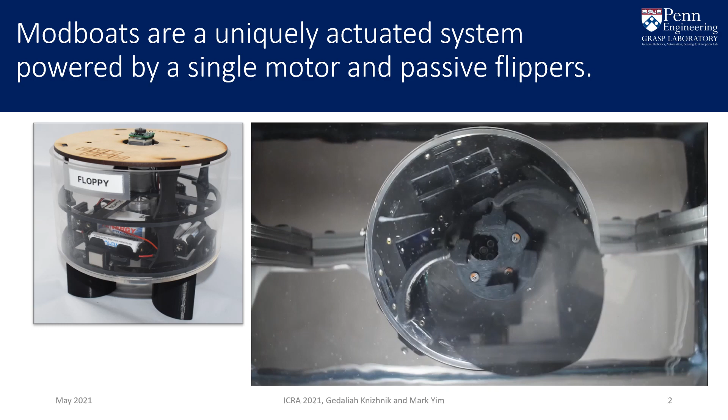The motor spins the bottom body relative to the more massive top body, and the oscillation causes the two flippers to open in a paddling sequence. This can be leveraged for both thrust and steering. By modulating various features of the oscillation, we can create effective steering control for this unique robot.

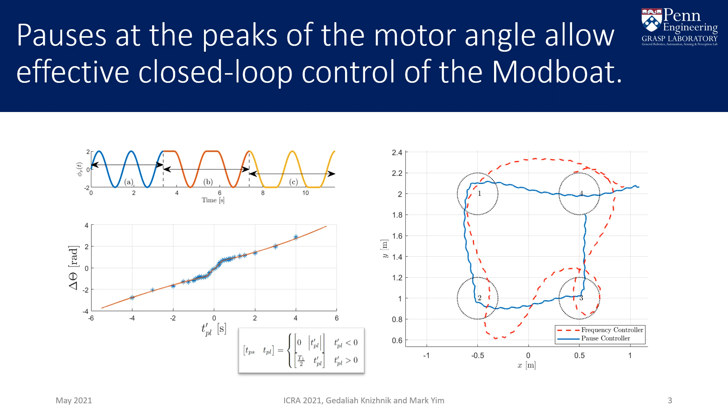In previous work, we demonstrated that pausing the motor at either the peaks or the troughs of its oscillation can create effective inertial turning, which we can turn into a controller and design into accurate waypoint following, as demonstrated by the blue path on this plot.

So we've shown that we can control individual modules, but we want to be able to create potentially large structures out of these units, which would allow high-resolution oceanographic sensing, among other applications. To accomplish this, we need to be able to dock modules together and to undock them from one another.

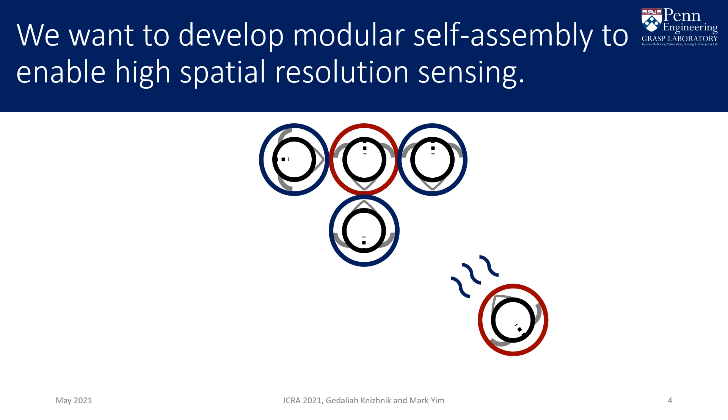This is challenging even for conventional robots, especially in aquatic conditions, but especially so for a non-holonomic and underpowered robot like ours. In particular, I want to highlight three main challenges for modular self-assembly. One: all parts of the Modboat are rotating, as is clear in this underview video. Docking to a rotating surface is not a trivial task.

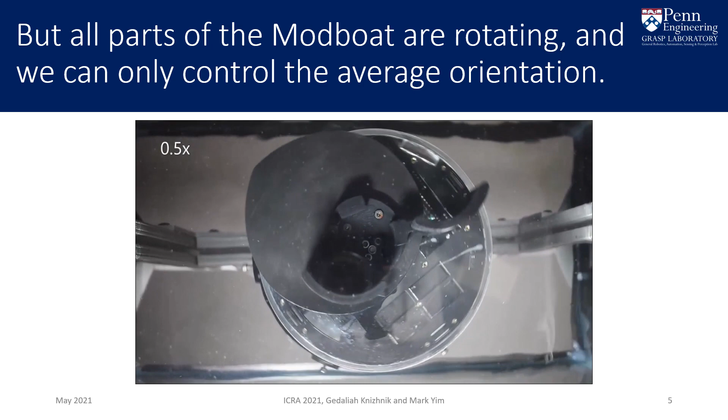Two: our discrete inertial controller only gives us control of the average orientation of the Modboat, because we need to oscillate to generate propulsive forces. But docking requires instantaneous control of the orientation.

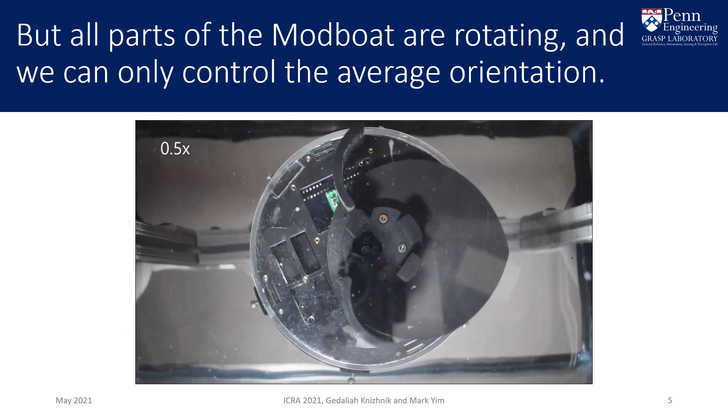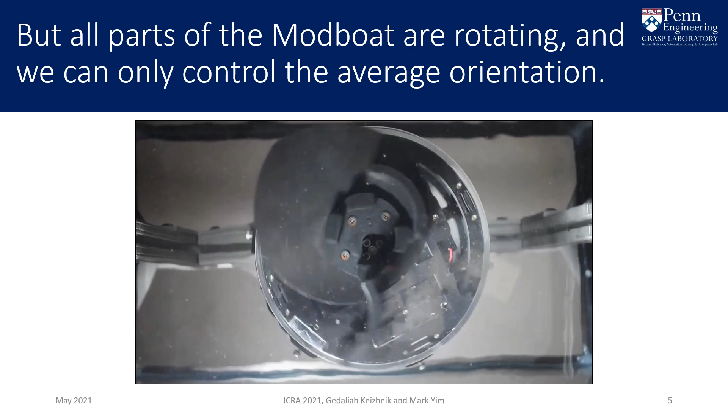Three: in our previous work, we were able to accurately hit waypoints that are 20 centimeters in diameter. But docking requires that the target be another Modboat, which is only 7.5 centimeters in diameter. These three challenges make the docking problem a significant challenge for our system.

So, before I discuss our solution, let's define what we mean by the docking problem. We want to find a solution for guiding a single mobile Modboat from an initial position to a docked configuration relative to a target Modboat. The target is not swimming and cannot adjust its orientation, although we do not assume it is explicitly stationary.

We choose this subset of the problem because we anticipate that a Modboat subassembly will not be able to adjust its orientation to help with docking. Thus, the single mobile unit bears the entirety of the challenge of the docking procedure. Finally, we note that the Modboat has a preferred front direction. Thus, we want to be able to dock in any specific orientation, so that the final Modboat lattice has specific directions for each unit.

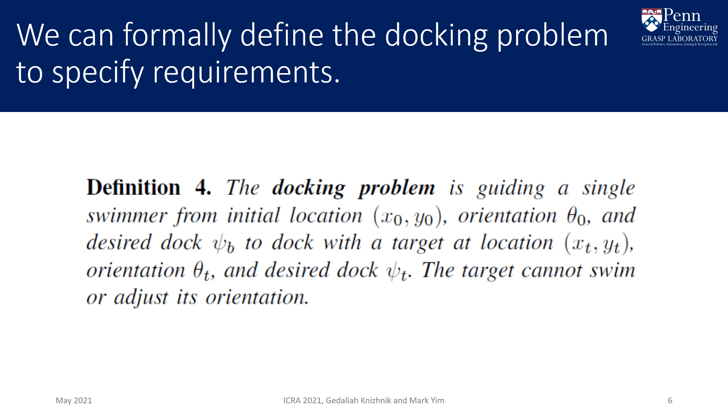So how do we solve this docking problem? We start by creating a passive docking system that has a large area of acceptance using permanent magnets. Each boat is given either a north or south designation, which maximizes the area of acceptance, and is given 4 docking points at the cardinal directions as shown. This creates a significant area of attraction around the Modboat, which can act to capture an approaching target, even if the approach vector is less than perfect.

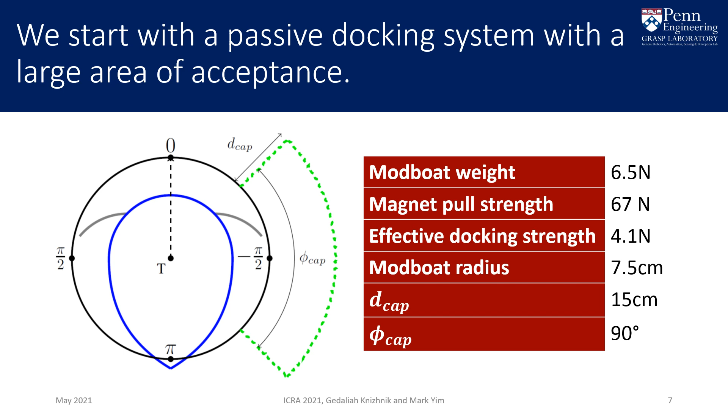Now, because we can control the Modboat's orientation only in the average while swimming, we need to allow time before the dock when the Modboat deactivates its propulsion to focus on orientation. To achieve this, we define a cone-shaped approach region and a finite state machine procedure for docking.

First, the Modboat swims towards the point C, achieving sufficient distance along the approach line to the desired dock on the target. Then, it swims towards the target boat until it is both sufficiently close and turning in the correct direction. If it leaves the approach cone at any point, we abort and try again.

At this point, if it has remained in the approach cone, the Modboat's velocity is pointing reasonably towards the target, and we can assume that it will drift the rest of the way and be magnetically captured. We can therefore shift our attention to stopping the rotation and setting the desired orientation for the dock.

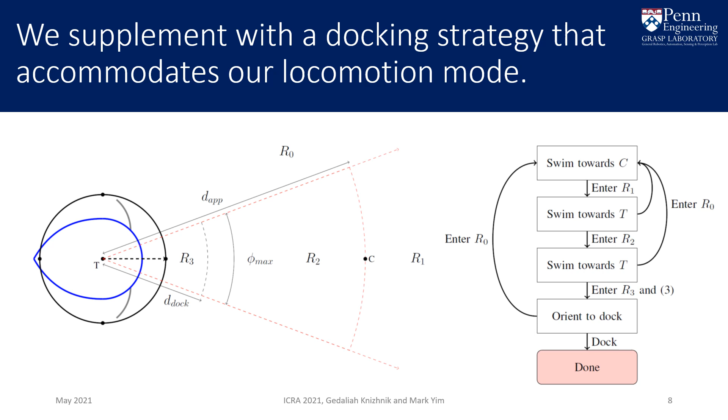How can we control the orientation during this final phase? Well, instead of oscillating, we switch to treating the bottom body as a reaction wheel for the top body. It's not ideal, because the top body is far more massive, and the flippers do induce some translation, but it works. We use the PID controller shown here.

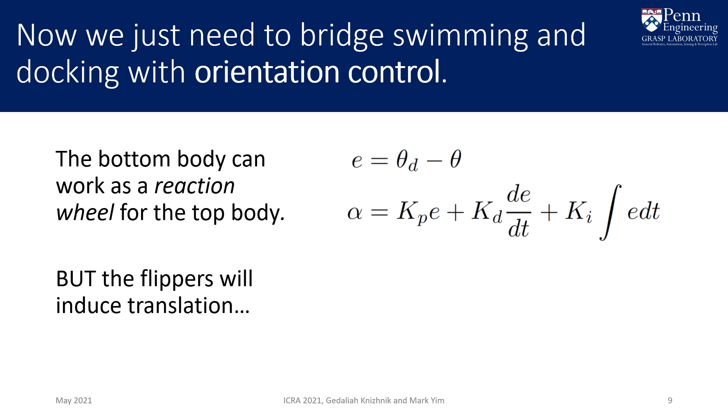The challenge, however, is that oscillations in the motor angle induce propulsion. Since we're no longer controlling swim direction, this propulsion will definitely be in the wrong direction and will prevent docking. So it's critical that the controller be overdamped. Except that means that response times are slow, which requires a more accurate approach vector that we can't guarantee.

Our solution is to use gain scheduling for the PID controller. We start with an aggressive set of PID coefficients for speedy response, and then switch to a non-aggressive set when 90% of the orientation target has been reached to prevent undue oscillation.

This graph shows the resulting performance. In blue, you can see that the gain-scheduled controller reaches the desired orientation much more quickly. Although it drifts much further in the long run, as shown in orange, in that short amount of time, it drifts much less. And so, as long as docking occurs quickly and obviates the need for further orientation control, this will be sufficient.

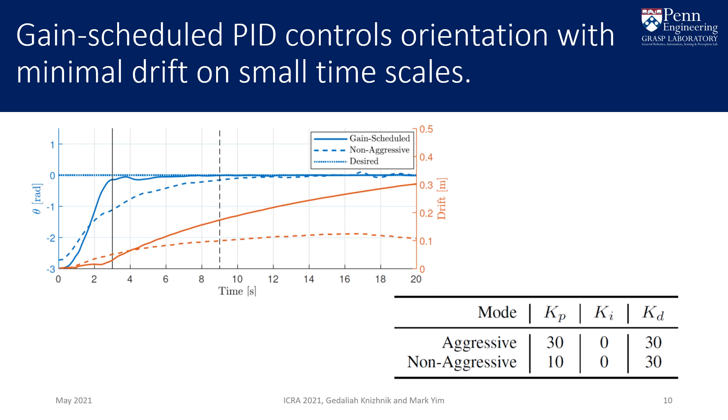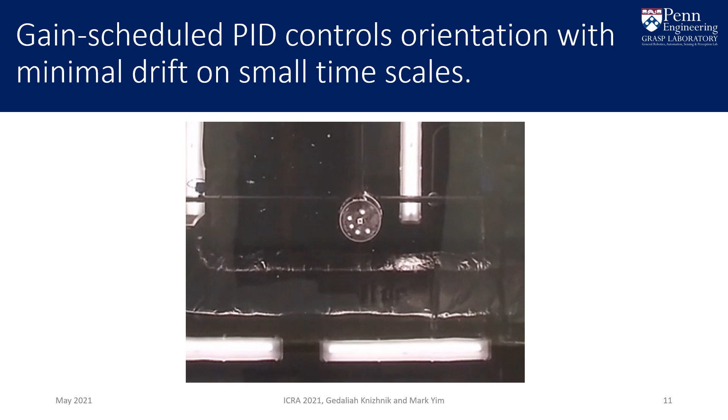In this video, you can see this control scheme in action. The Modboat adjusts its orientation by 180 degrees, with barely any drift occurring during the maneuver. Most of it occurs afterwards.

So, does this strategy work? Yes, in 3 out of 4 configurations. We can achieve front docks and both side docks, where the Modboat spins by 90 degrees before docking, with over 95% accuracy. But we have less than 50% accuracy in achieving rear docks, where the Modboat needs to execute a full 180 turn before docking.

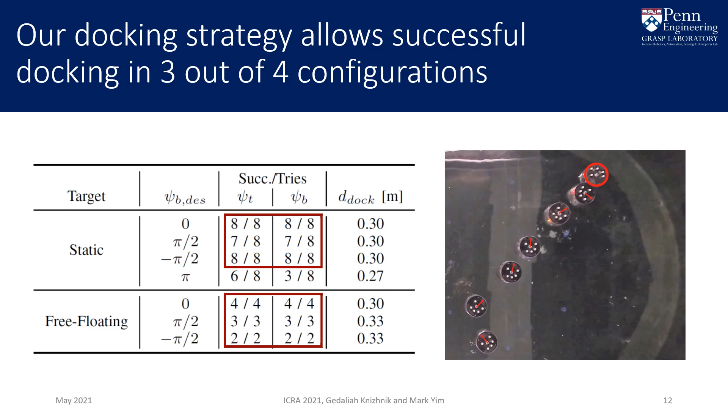As I mentioned, however, our method fails to execute 180-degree turns successfully. If the transition to orientation control occurs too far away, the propulsion that cannot be decoupled from the orientation control maneuver is sufficient to counteract the dock, as shown here on the left. If it occurs too close, however, there isn't enough time to execute the maneuver, and we end up with a side dock instead, as shown on the right. This restriction is unfortunate, but we can work with it when creating structures and associated assembly orders.

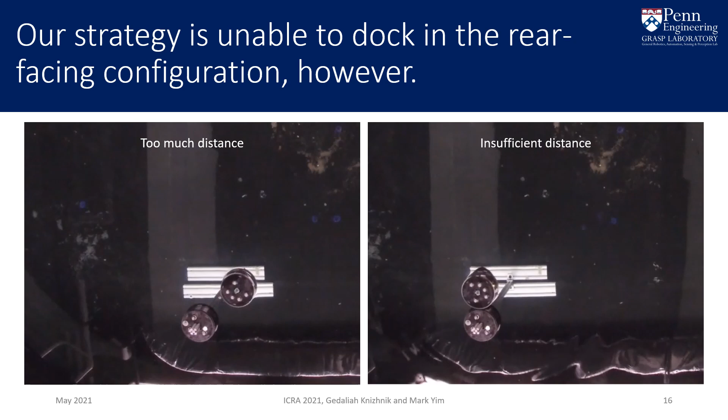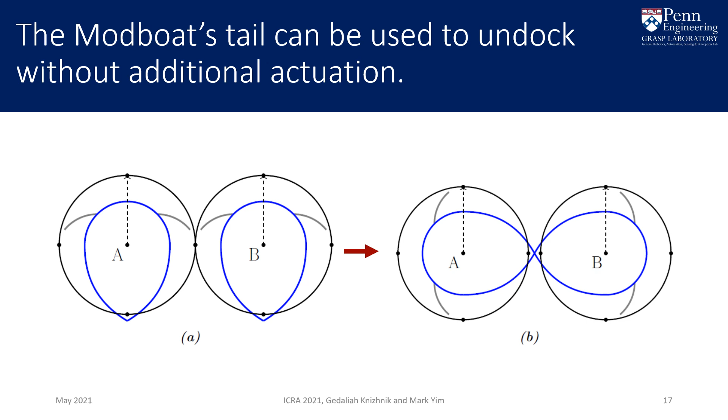Now, all of that was for docking, but modular self-assembly requires undocking as well. But that's what the tail is for. Although the flippers are completely enclosed in the footprint of the top body, the tail is not, and so by bringing their tails together, 2 neighboring Modboats can break their magnetic dock and separate without any additional actuators.

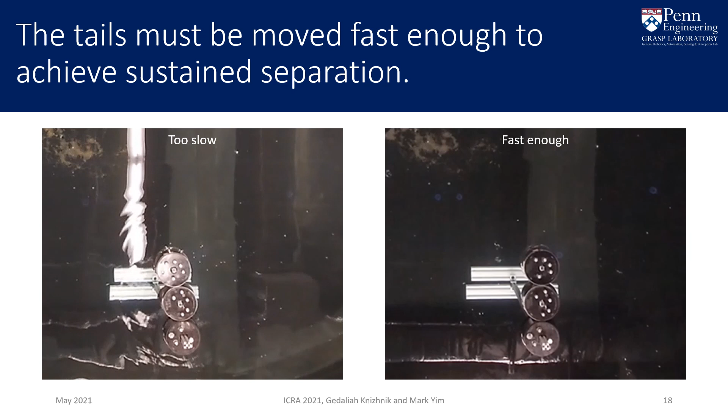Unfortunately, because the magnetic docks are passive permanent magnets, they can't be turned off. Thus, creating separation isn't enough to undock. We also need to prevent redocking. Moving the tails together slowly fails for this reason. The 2 top boats easily undock from one another, but then immediately redock as soon as the tails move away. Adding speed to the motion, however, adds enough impulse to cause the separated boats to drift out of magnetic reach.

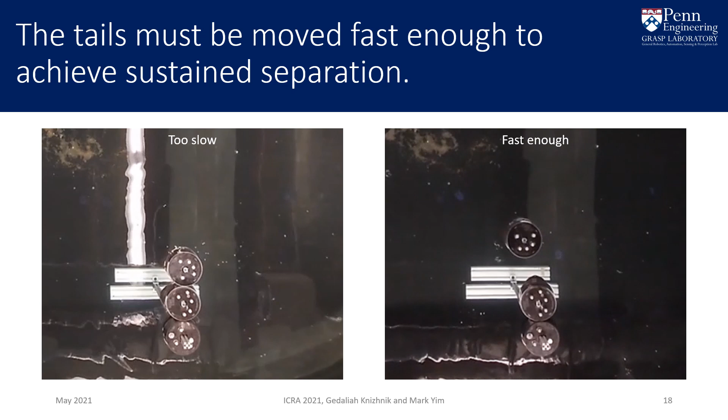As it turns out, there's actually a sweet spot in between those 2 versions, where a successful undock occurs, but there is enough impulse that the redock is in a rotated configuration. Notice in this video that the rightmost boat has reoriented by 90 degrees after the undock maneuver. This fills in the gap left by our docking procedure. If a rear dock is needed, it can be accomplished by using a side dock and then reconfiguring by 90 degrees using the tail.

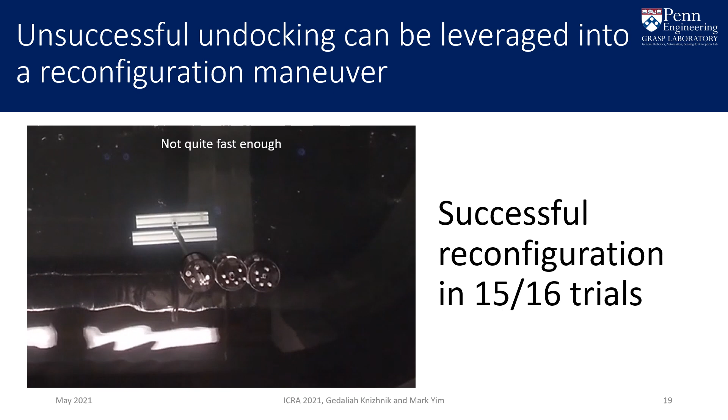In conclusion, we have shown that the Modboat, an oscillating swimming robot powered by a single motor, can dock to neighboring modules using control techniques from our prior work in 3 out of 4 configurations. We can also undock from neighboring modules without additional actuation, and we can use reconfiguration maneuvers to access the dock configuration that was inaccessible through normal techniques. Thus, the Modboat is now ready for modular self-assembly.